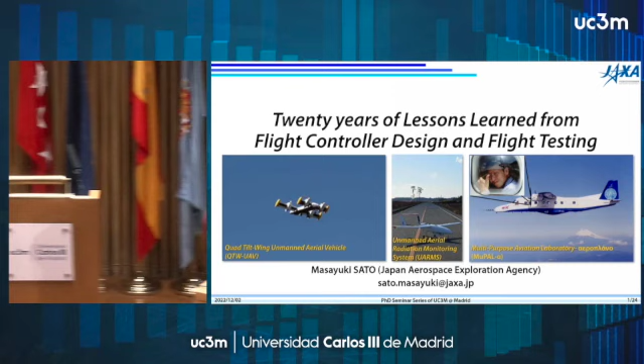But many people want to get back to their hometown, so we must examine how much radiation affects the area. If you can walk there and check that radiation power is not so strong, that's fine. But if there is a spot where radiation power is so strong you cannot get there, if you measure over there, you will be radiated - it's terrible. So to escape such a tragedy, this aircraft was developed.

Radiation power is monitored from the sky - it's a very convenient and safe way to examine the radiation power around the Fukushima nuclear power plant. But during this development, we found that finding an appropriate runway is very hard, because this aircraft has a conventional type, so we need maybe about 200 meters of runway to take off and land.

Is it possible to find such a long runway? No, indeed, it's very hard to find the appropriate place for landing and taking off.

Another solution to find such a big place is to invent vertical aircraft, VTOLs. That is quad tilt wing unmanned aerial vehicle, in short QTW-UAV. That's a vertical aircraft like an Osprey, so we have no need to find a wide area to operate this aircraft.

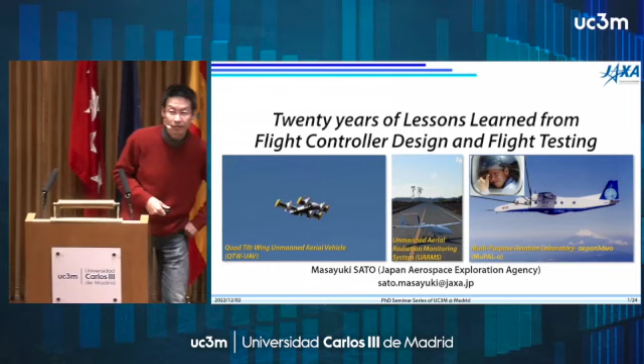But of course, this aircraft is operated by just electricity, so we need further development to use in practical cases. When we talk about these topics, let me give some lessons learned from these experiments. This is mine, and he is one of my bosses.

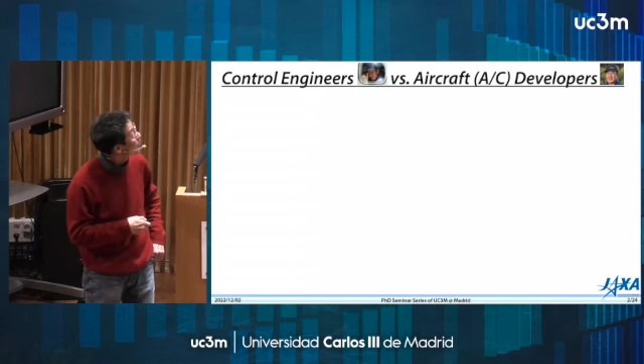So we first give some background of this talk. Usually control engineers, including me, want to implement newly developed controllers, but sometimes it's too complicated to implement in practical systems. But usually my bosses want to implement well-established controllers, that is, a PID controller.

So why do you use a PID controller? It's very simple and very easy to tune appropriate gains. But sometimes slightly poor performance might be introduced. Still, usually they want to implement very established controllers.

So the objective we'd like to compare: we would like to implement newly developed controllers to realize good performance. That's reasonable, but of course the first priority objective is reduction of development risk.

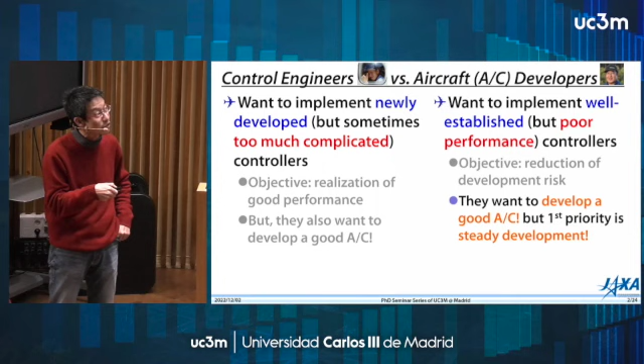But of course we also want to develop a good aircraft as well. They want to develop a good aircraft, but first priority is steady development. So the objective is the same on both sides, but different priority leads to a very severe conflict sometimes.

So that's why we usually invent or design very conventional flight controllers using PID controllers. After that, we replace them with sophisticated ones. During this process, we need to obtain our bosses' trust.

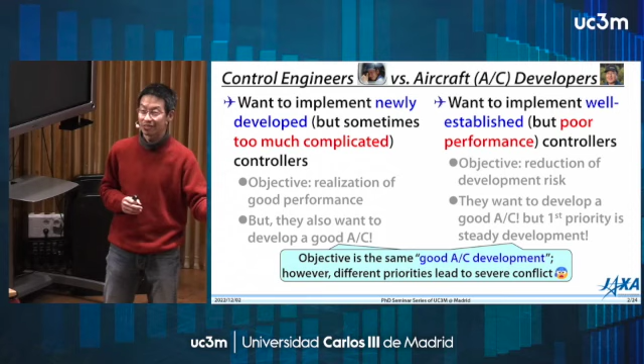That is the main message from this talk. So, of course, it is very important to pursue both ways. That is, developing new control technology and developing a good test bed are both necessary to survive this competitive world.

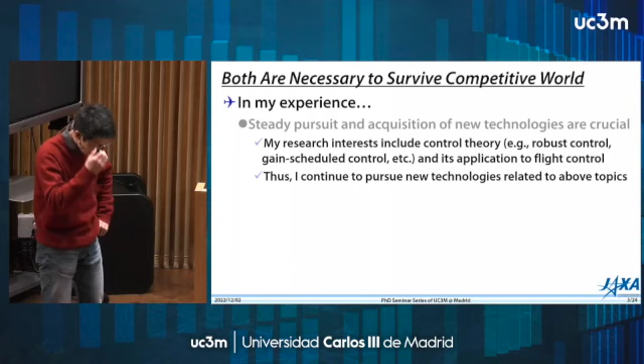In my experience, steady pursuit and acquisition of new technology are crucial to survive this competitive world. In particular, my research interests include control theory, so I continue to pursue new technology related to these topics, robust control and gain scheduled control, something like that.

But if you want to demonstrate your controller's practicality, it is very important to have flight demonstrations with your designed controllers. Otherwise, many workers in industry usually say, oh, your controller looks very nice, but how practical is your controller?

How do you implement it? That is a very critical point in my sense. So flight facility is very important to demonstrate your controller's performance, your controller's effectiveness compared to the conventional ones.

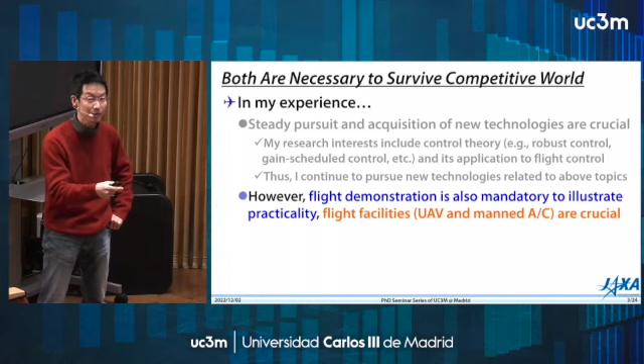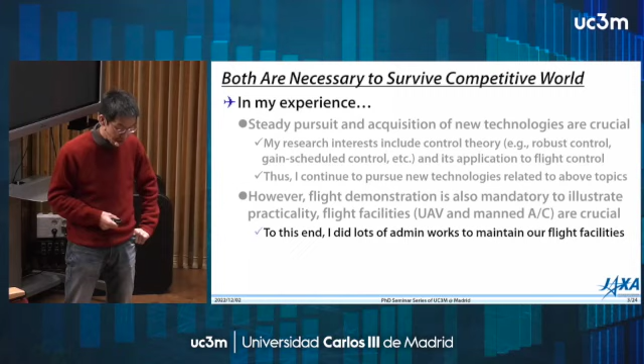To this end, indeed, I did a lot of admin work to maintain our facilities. So if you get into some research or academia positions, I strongly recommend doing a lot of admin work to keep your facilities. This is just a message for master's course students.

And in Japan's case, you may know this. Have you ever heard of MRJ's name? No? Oh, thank you so much. Yeah.

MRJ is a short abbreviation of Mitsubishi Regional Jet, and that was renamed Mitsubishi Space Jet. I remember that. Anyway, Mitsubishi Heavy Industries launched a regional jet, but its development has stopped.

Why? Because they wanted to implement new technologies as much as possible, but they could not get the certification from the authorities. So they stopped the development. That is very terrible for Japanese communities and Japanese researchers.

But we'd like to emphasize that if you want to advance your technologies and do related work, you must first use a very obsolete but very well-established technology to develop something.

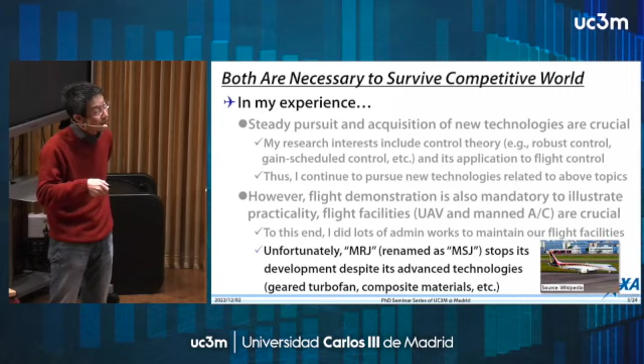That is a very bad example. So Mitsubishi Heavy Industries has stopped, and I guess we cannot restart its development program forever because we have already spent a lot of money, and I guess the authority has already abandoned the process, I think.

So in my belief it is very important to give a very steady development for the future. Okay, but this is a little bit of a historical topic. Japan, you may know that in World War II we lost against United States and many countries. But at that time Japan had some very advanced technology related to aerospace. So, in my understanding, one of the examples is mechanical gain schedule control in World War II.

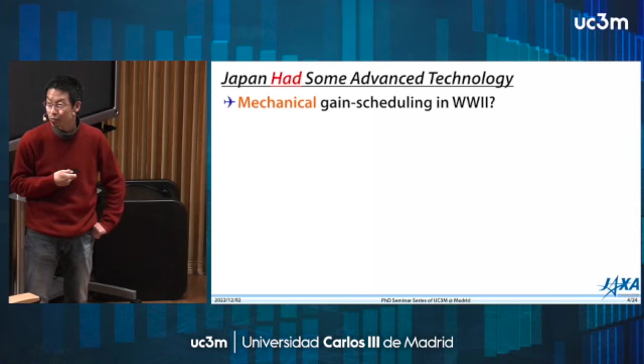This picture is pulled from Wikipedia, and this is a Zero Fighter here. The Zero Fighter uses mechanical gain schedule techniques depending on aerodynamic pressure.

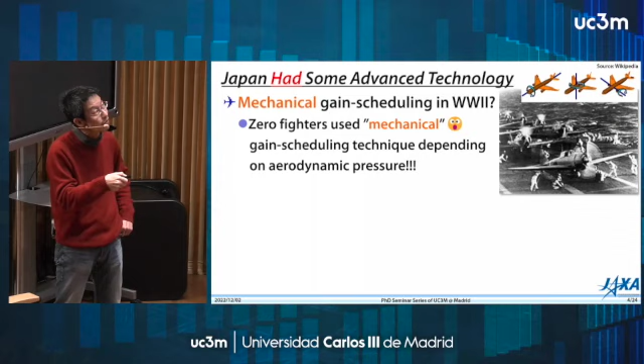Really? I hadn't heard of that before, maybe 2 years ago or something. So usually many guys already know the dynamics of flight control. That is, aircraft are usually controlled by an aileron, rudder, and elevator. They use aerodynamic pressure to create moments.

So here, if you fly in a high aerodynamic pressure condition, then with very small deflection angles the ailerons and elevators create a large moment. If a large moment is created, this might happen: pilot-induced oscillation. Of course, the cause is different in this case.

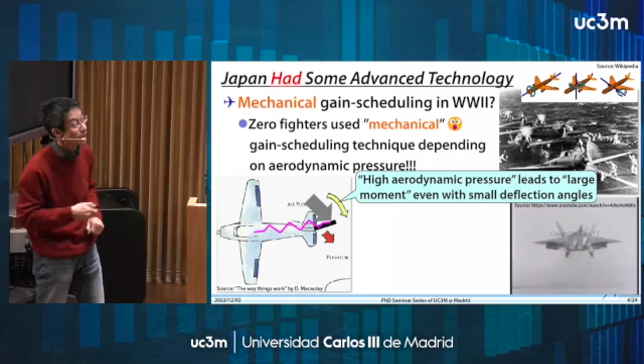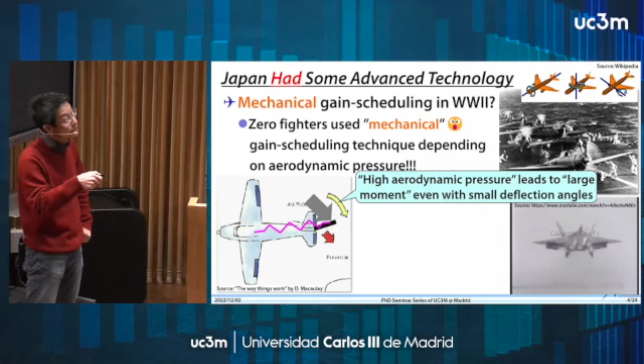This PIO was reported to be caused by the actuator limit. That is, there are some limitations of actuator movement, and this limit introduced such an accident. But similar oscillations will also be introduced by such a large moment.

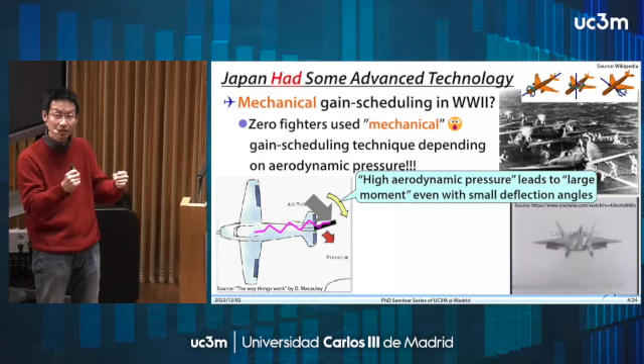For example, if the pilot moves the stick like this, and the aircraft moves very heavily and severely, the pilot thinks 'oh, it's too much' and reacts. But again the reaction is too much, so there is pilot-induced oscillation like this.

That is amazing for us. This is indeed a mechanical gain scheduling control technique. Of course nowadays we can easily solve this using software and advanced control techniques, but that was an amazing technique in World War II.

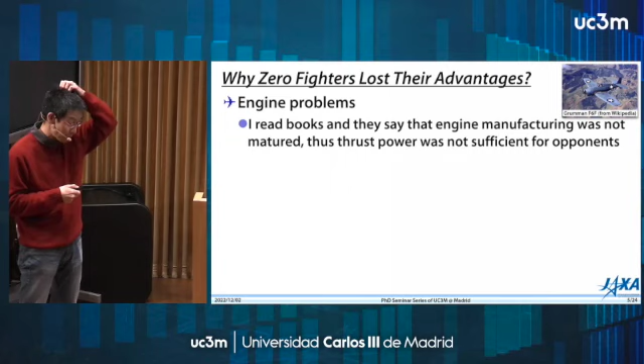So you may know why Zero Fighters lost their advantage. Of course there are several reasons. One of the reasons, which I read in several books, is that engine manufacturing was not matured, so thrust power was not sufficient compared to opponents like the Hellcat, like this one.

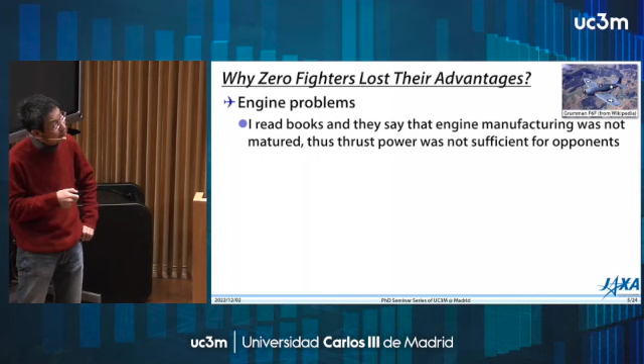And of course we have another problem, the structural problem. The fuel tank is very fragile. To reduce weight, the fuel tank easily catches fire without bullet protection and so on. And of course the maximum operation speed is reduced due to insufficiently strong structures like this one.

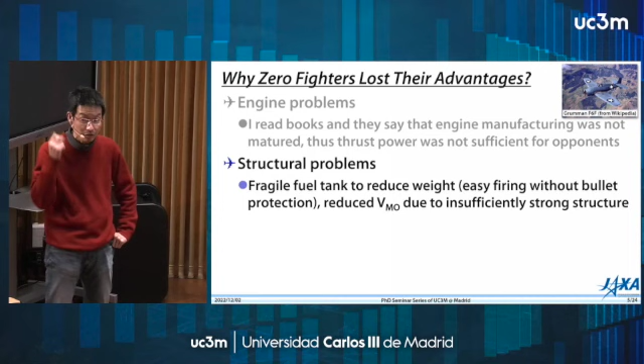But in my opinion, the most crucial factor is lack of humbleness. Usually, how to say it, Japanese might be slightly arrogant because their fighter had a lot of advantage compared to their opponents, so they didn't continue polishing their techniques.

So in my understanding, this is a very important part: to be humble. You may know that in Japan, in the late 1980s, we had a big bubble economy and a lot of money, but the bubble economy has already gone away, and Japan is still struggling in economic crisis nowadays. So I think Japanese people might be arrogant, and it is very important to be humble.

So my general message, this is a very general message in particular for master course students: be humble and keep trying to acquire new technologies. Of course that is a kind of spiritual talk, sorry for that. But after that, I'd like to talk about flight control design and flight testing.

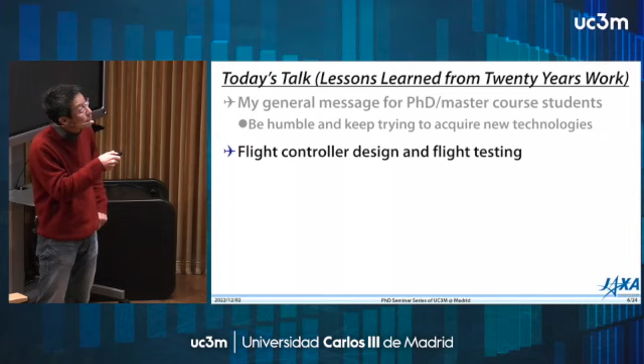First I'll give some topics related to in-flight simulators, using the MuPAL-alpha. In this flight test we designed flight control using H infinity control techniques. Of course nowadays H infinity control is slightly obsolete, but maybe 15 years ago H infinity control was still active, a very hot topic. At that time usually it was not allowed to implement H infinity controllers, but due to some reasons we indeed implemented H infinity controllers on an actual aircraft.

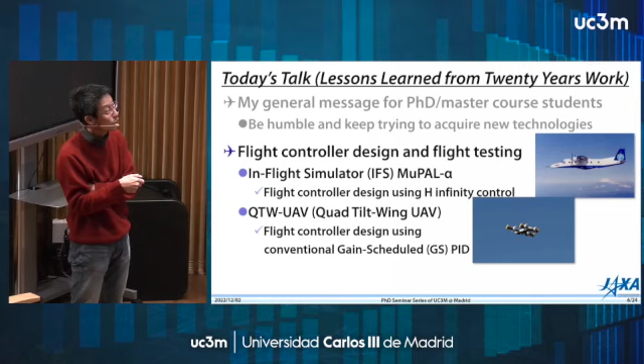After that, I'll talk about flight control design using UAVs. In this case we designed conventional gain scheduled PID controllers, and after that I'll talk about UARMs, the unmanned aerial radiation monitoring system.

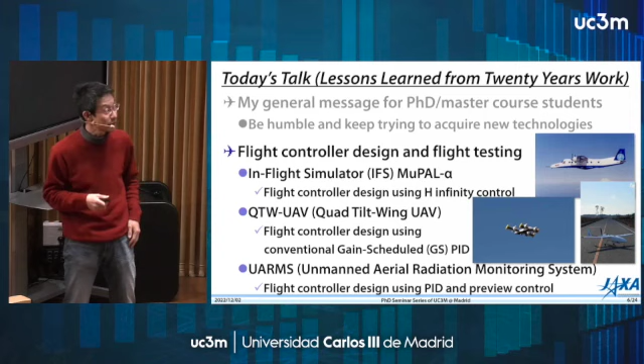In this case, we incorporate preview control in addition to the conventional PID controllers. Of course, at first, my boss was not allowed to implement this controller, preview control, but after several steps, we got permission to implement it. So I just talk about this issue.

Have you ever heard of the in-flight simulator? Could you raise your hand if you heard? Okay, nobody knows. What is an in-flight simulator? That is an aircraft that achieves an extension of ground-based simulator to the flight environment, the real-world cues. It's a conceptual description.

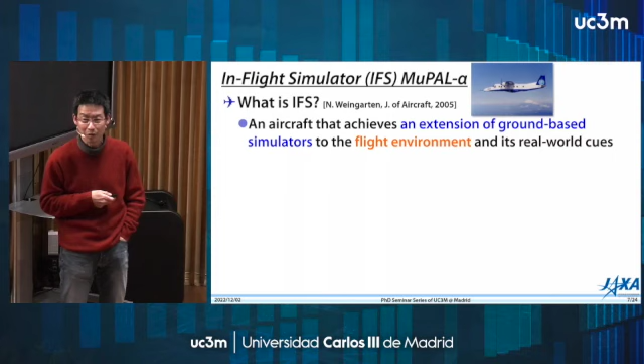In other words, the in-flight simulator is an aircraft that can mimic other aircraft characteristics in flight. So how do we do this? How does MuPAL-alpha mimic other aircraft characteristics?

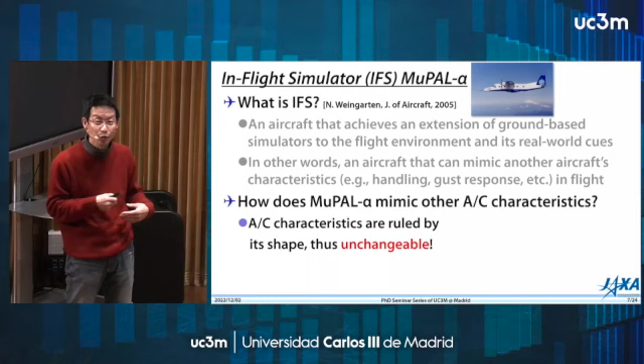Of course, you may know that aircraft characteristics like CL alpha, CL, CD, and such coefficients are ruled by its shape. Of course, we cannot change shapes without authority permissions. How can we change it?

So that is an in-flight simulator controller. But if we design an appropriate controller to mimic other aircraft, this aircraft moves like other aircraft. So the in-flight simulator was used to demonstrate and examine handling characteristics for newly developed aircraft.

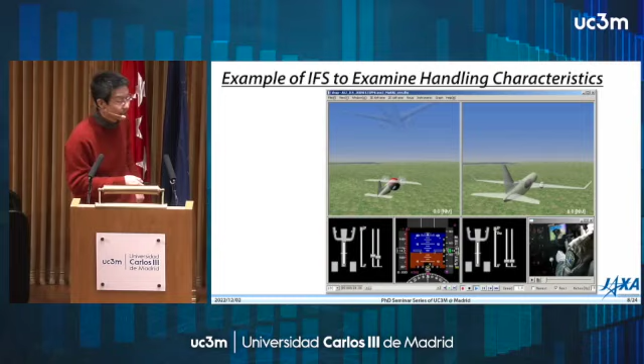This is an animation here, but this is an actual video recorded in the flight test. In this animation, that model aircraft is shown here. That model aircraft motion is calculated by an onboard computer with right-hand side pilot input.

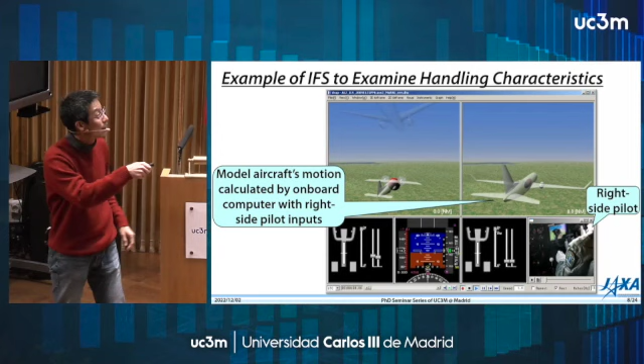Of course, this pilot indeed sat on the right-hand seat of a research aircraft, and controlled the wheels, pedals, throttle levers, and so on. Using this control input with appropriately designed controllers, using just the aileron, elevator, rudder, and thrust, our MuPAL-alpha moves like this aircraft.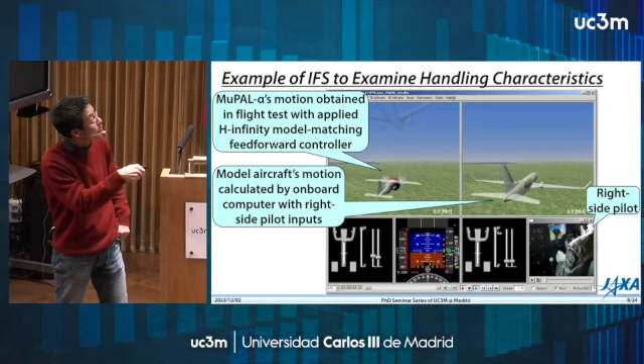MuPAL-alpha motions here were obtained in a flight test with applied H-infinity model matching control. Okay, I'll show you a video.

So there is no sound, sorry for that. But indeed, here the F2 pilot, a fighter pilot working for Mitsubishi Heavy Industries. We had a good collaboration with Mitsubishi Heavy Industries at that time, and he came to my facility site, got on our MuPAL-alpha, and controlled our aircraft.

And in this case, this aircraft is approaching some regional airfield.

And you see that there is an airfield over there. Of course, this pilot doesn't see the motion of this aircraft. This pilot just sees outside from this aircraft. So this is an offset landing approach. There is a runway there, and an offset approach is set, and he's trying to keep this straight away.

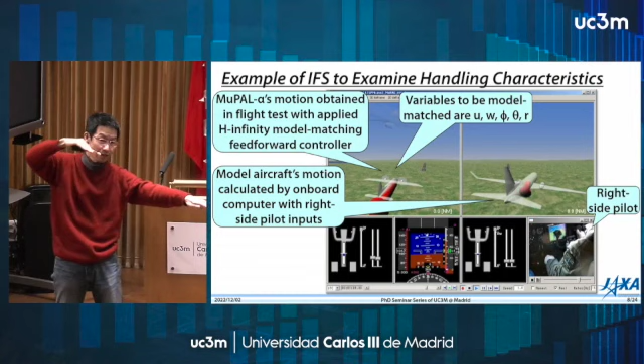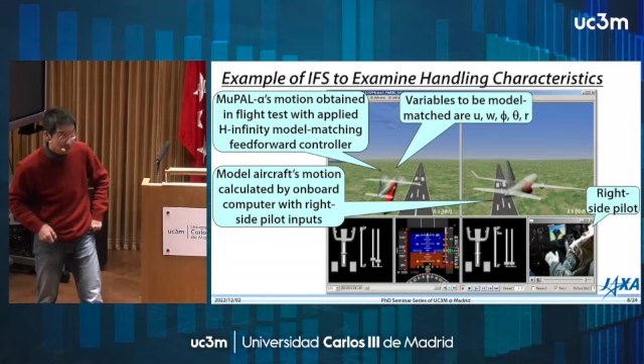And at a certain different distance from the airport, a maneuver is created by this pilot. Of course, yaw angle is slightly different because we cannot control 6 degrees. We just have 5 degrees, so we just control forward speed, vertical speed, roll angle, pitch angle, and yaw rate only. We cannot control yaw angle. So that is why there is some difference here.

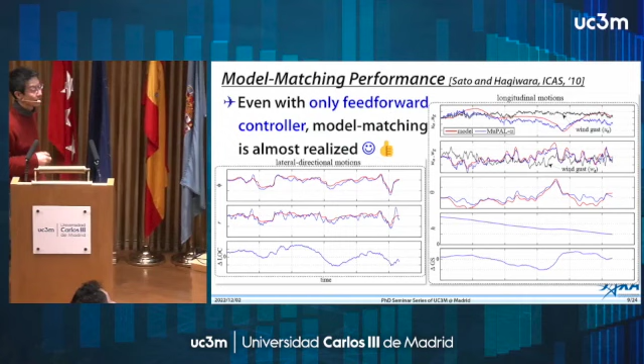But indeed, in this flight, even with only feedforward control, the model matching is almost realized. Because here the bank angle, yaw rate, the deviation of the localizer, and the longitudinal motion is here - that is forward speed, vertical speed, pitch angle, altitude, and glide slope deviations.

So the red lines represent models calculated by onboard computers, and the actual flight test result was drawn by blue lines here. The units are removed due to confidentiality issues, but as you see, there is almost overlapping here.

So usually, flight control engineers ask me why feedforward controllers alone were used. Because feedback controllers change gust response, which may make the pilot feel different from normal aircraft motions. So to prevent such an effect, the customer required us to use only feedforward controllers.

But in feed-forward control design, we use advanced design techniques, H-infinity control design. And furthermore, we obtained trust from the pilot in JAXA. That was a very good occasion for me to obtain JAXA's pilot trust.

After that, for example, we implemented weird controllers for pilots. In this case, we use gain schedule controllers designed by LMI, so the matrix size, the controller size, is very huge. Like the state space model has about maybe over 300 values or something like that. That is very unconventional for pilots.

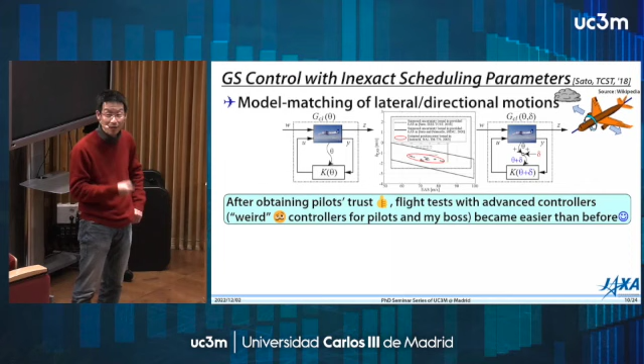Okay, after obtaining the pilot's trust, we easily implement our designed controllers. In this case, the scheduling parameter is affected by uncertainties. The scheduling parameter is set in equivalent speed, but usually equivalent speed is measured by pitot tubes, so we have some uncertainty in the measured equivalent speed.

But if we design appropriate gain scheduling controllers by considering the effect of uncertainties, we can easily design a good model matching control like this one. So the objective is to coincide the blue lines with the red lines. Here, on the left-hand side, you can see there are some discrepancies.

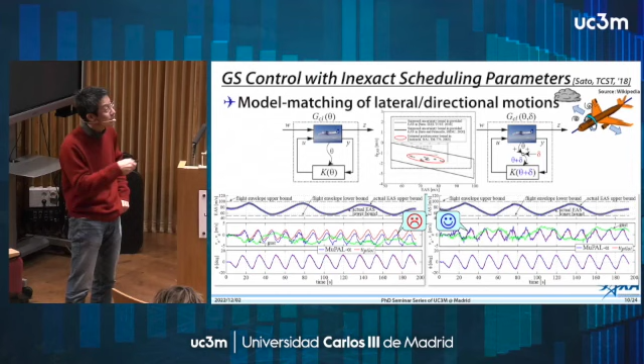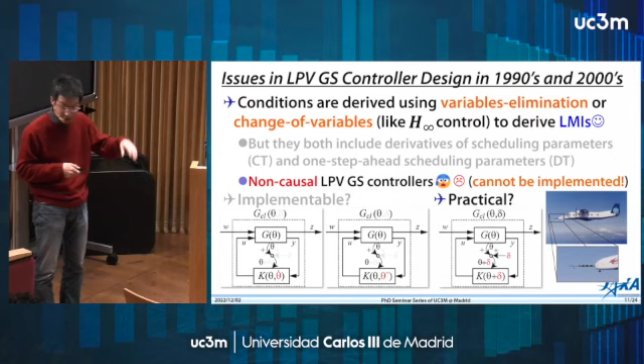Okay, this slide and the next slide are a little bit complicated, so I would like to skip a little bit. So this slide is... sorry.

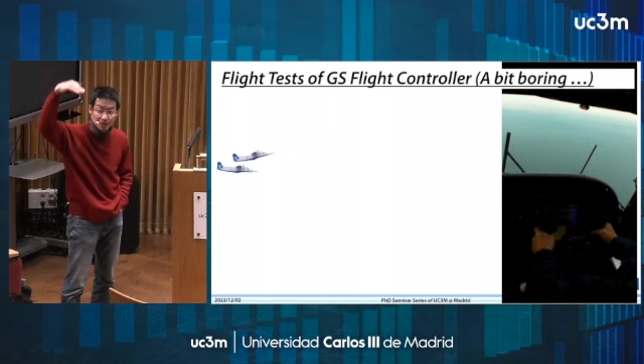Indeed, this is a flight test video. After implementing our designed controllers, we had a flight test. During this flight, the pilot moves control, like heaving and going down, and during these motions, roll and sway speed commands are created by fly-by-wire computers. But speed is controlled by the pilot maneuvering this way.

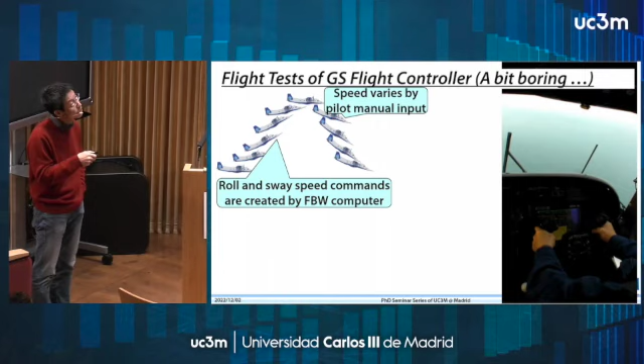During this flight, gain scheduling flight control was implemented, and we had a test result as shown before.

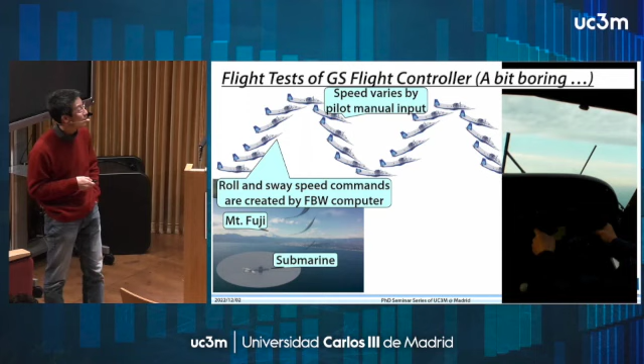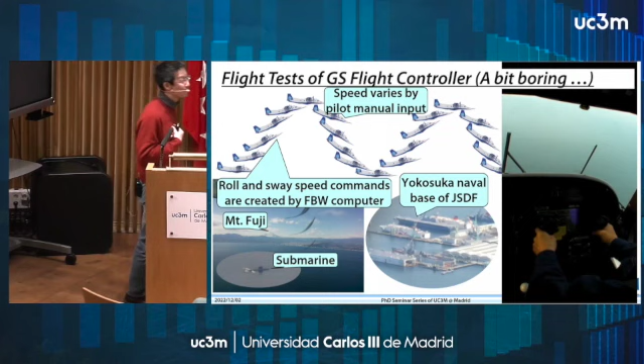During flight, we can see some good scenery, Mount Fuji, and sometimes we can see submarines, and we can also see the Yokosuka Naval Base as well. But of course, this is business, that is my duty. This is not fun, but anyway.

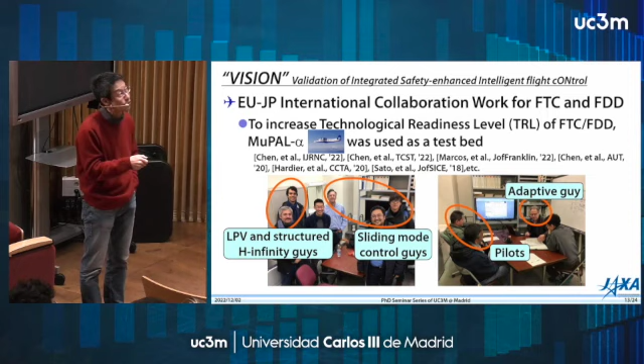After that, I had a good international collaboration work with Anders. Indeed, we have an EU-JP international collaboration for FTC, fault tolerant control, and FDD, fault detection and diagnosis, working with these guys. Here is Anders, as you see.

Lessons learned from 20 years working on JAXA MuPAL-alpha: good work should be done within customers' requirements, and after achievement, trust would be obtained, and then another chance comes. Thanks to, in my case, the vision indeed—I had a vision project in the EU-JP project, and I owe a lot to Anders, so thank you so much. And however, even within severe constraints, keep trying to acquire new technology or apply new methods in order to advance your skill. That is a very important message to myself as well.

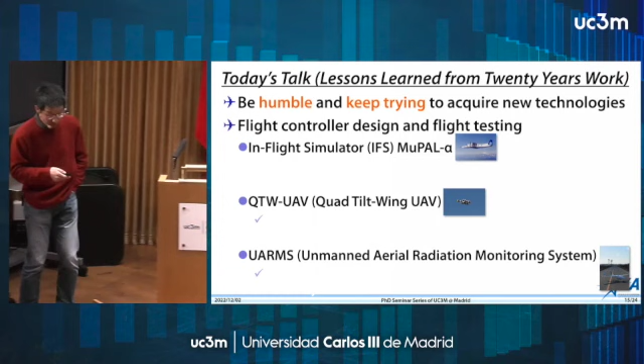I guess time is running, sorry for that. But next, we'd like to go to the QTW and UARMS.

As I said, the QTW is a conventional aircraft where the tilt wing is tilted up, up sideways. In this case, thrust creates vertical lift, and in this case, thrust creates forward speed. So to fly this aircraft, we must design a PID controller like this, a very conventional SCAS structure, but scheduled by the tilt angles.

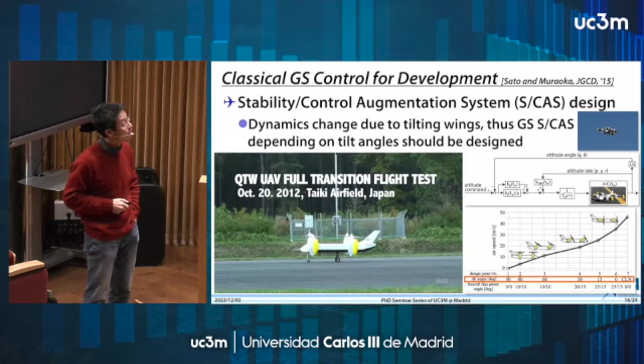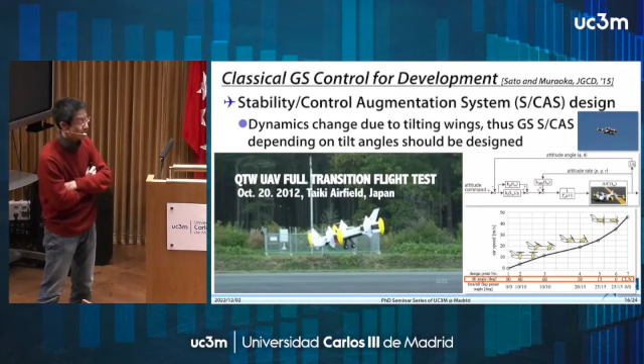Seeing is believing, so I'll show the video. After designing an appropriate gain scheduling controller scheme like this one, we implemented our designed controllers and had a flight test.

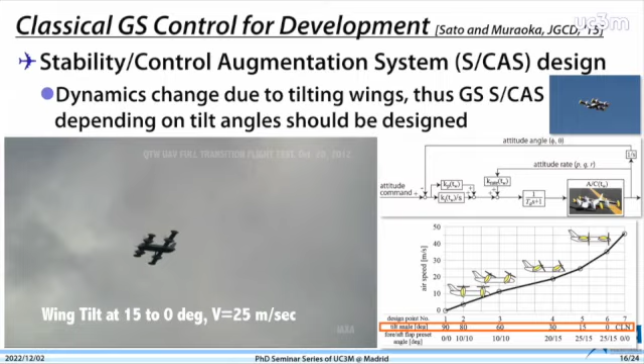At that time, we didn't implement speed control, so speed control was made by a ground pilot. I just called out the current speed and the target speed to adjust the throttle lever.

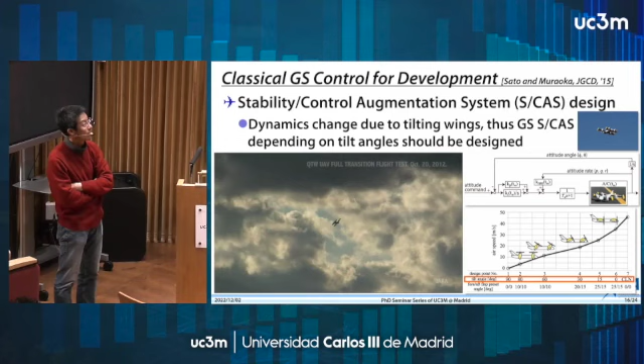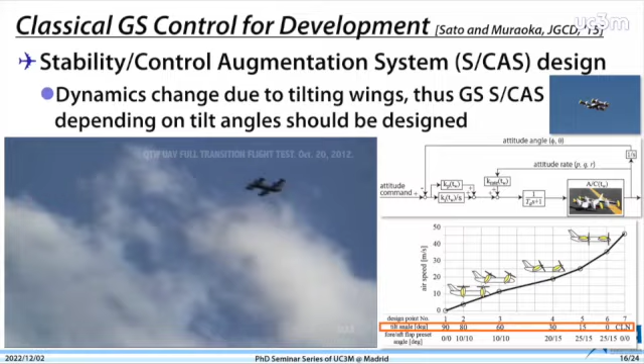Of course, in this case, I just show a successful flight like this one. But we had, sorry for that.

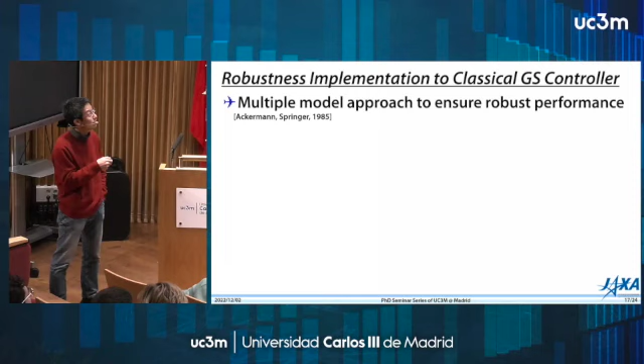How did we design the controllers? That is a very simple technique: robustness is implemented in the classical gain-scheduled controller using the multiple model approach. This is very classical. We first set a cost function like this one, and we set supposed models representing uncertainties. Using this cost function, we just minimize using the gains to be designed. This is a very simple combination.

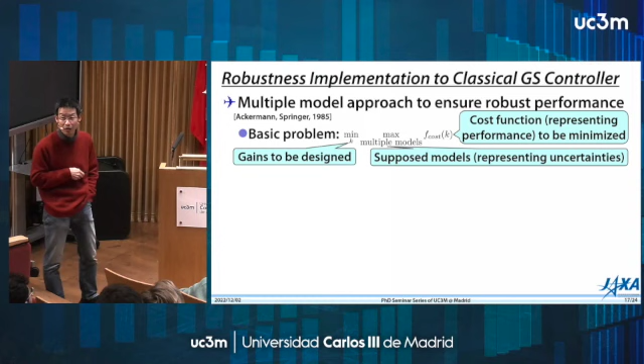But of course, we usually have some constraints to be satisfied, which are also implemented like this. In this case, we must slightly revise the cost function using weighting coefficients, lambda.

We also extend this formulation to the case in which the disturbance effect should be incorporated. In this case, we have maximum functions here and max functions here. For this augmented max function, we must minimize the cost function using K. That is a very simple formulation, and we can easily obtain practical controllers like these.

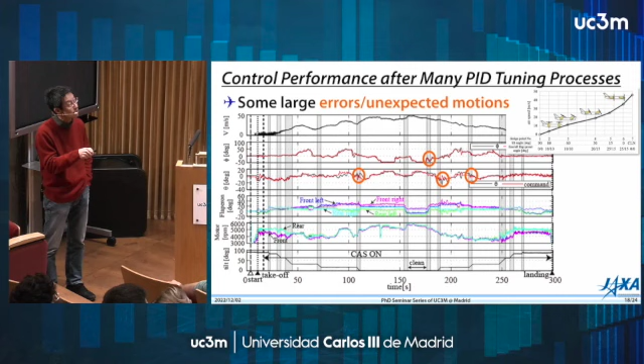You can see that the bank angle and pitch angle are controlled. The blue, red, and black lines are almost the same, so very good performance is obtained. But as you see, there are some large discrepancies that happen here, like this one. These cannot be overcome by gain tuning, so I think advanced design should be applied to overcome these issues.

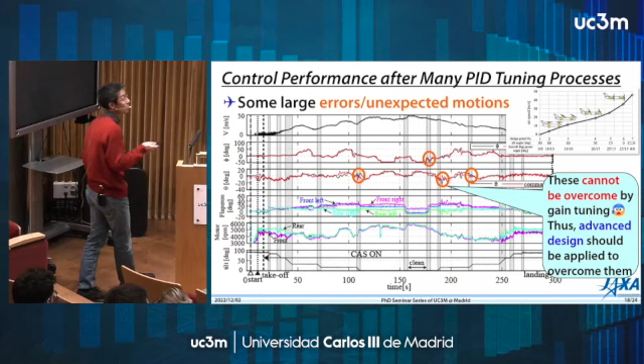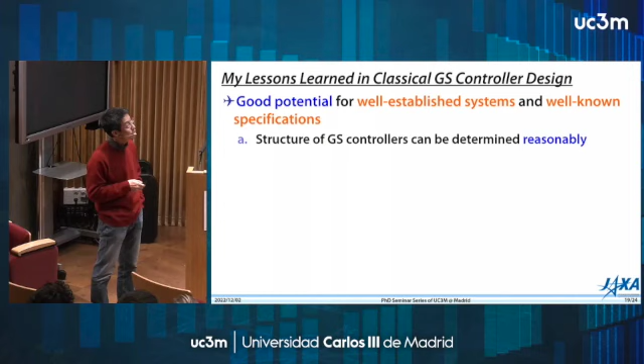In this subtopic, I found good potential for the conventional PI controllers. The structure of a gain schedule controller can be determined reasonably, and a very simple structure is very welcome for implementation and on-site tuning as well. Easy implementation is very appreciated by many researchers, and easiness of on-site design is also appreciated by many people.

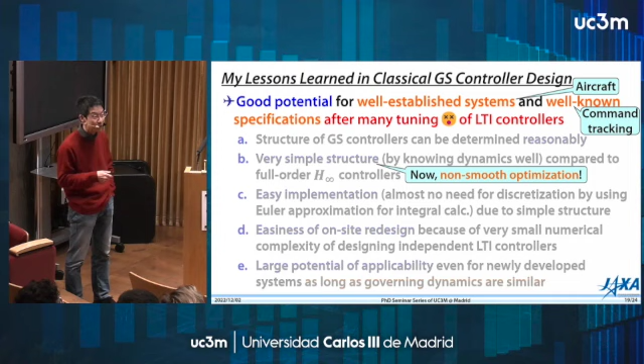For the successful flight, indeed, we did many tunings. It is very tedious and laborious work, so I think it is better to advance our technology for the future.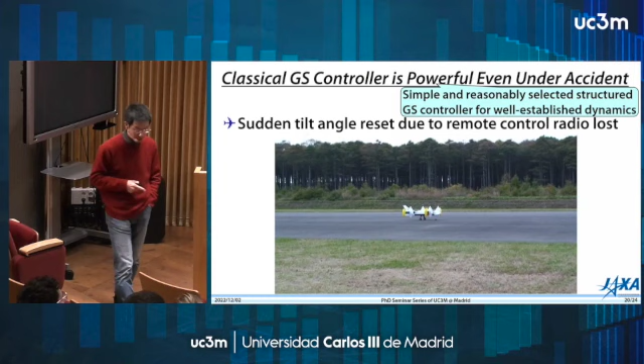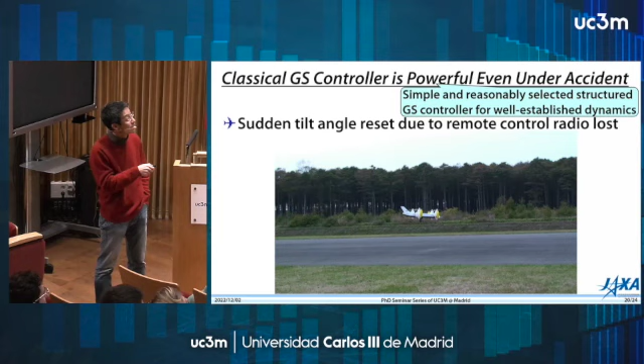But I also understand that the conventional PID controller works very well. In this case, however, there was a small accident. When the remote control radio was lost, the aircraft was falling down.

But the SAS system indeed worked well, and the SAS rescued this aircraft.

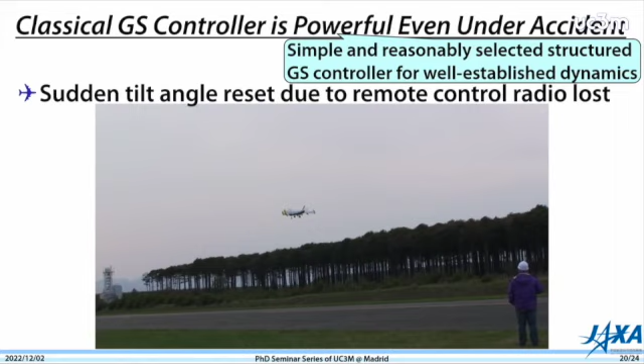On that day there was a very beautiful sunset. Here you see, very beautiful. But here, falling down indeed.

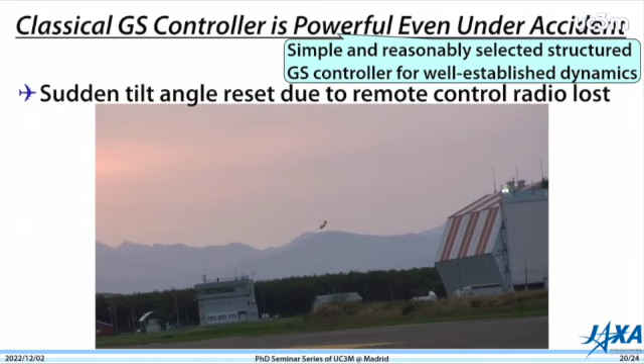In this case, only SAS works - the stability augmented system only. The control augmented system doesn't work. But even in that case, SAS works very well, and the SAS rescued this aircraft indeed.

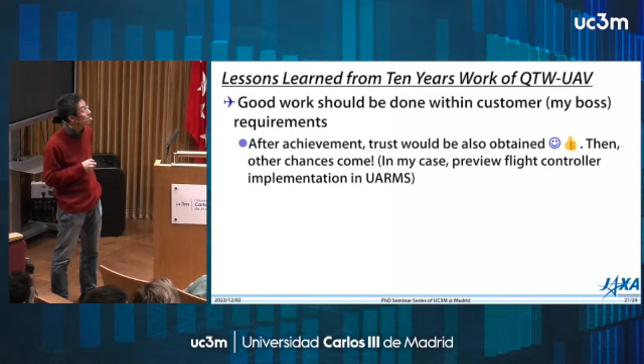Good work should be involved in the QTW work. Good work should be done within the customer's requirements, and after achievement, another occasion will come. Of course, in this case, significantly advanced technology was not applied, but the development was used as a chance to obtain the boss's trust.

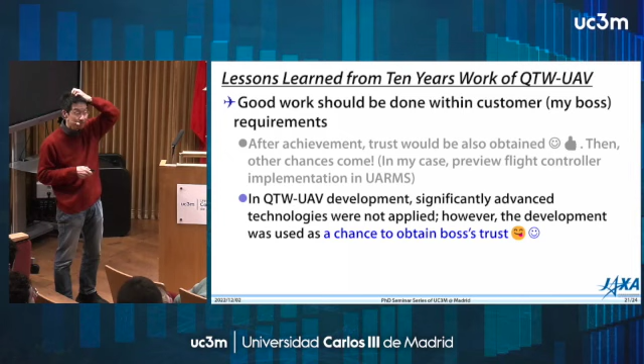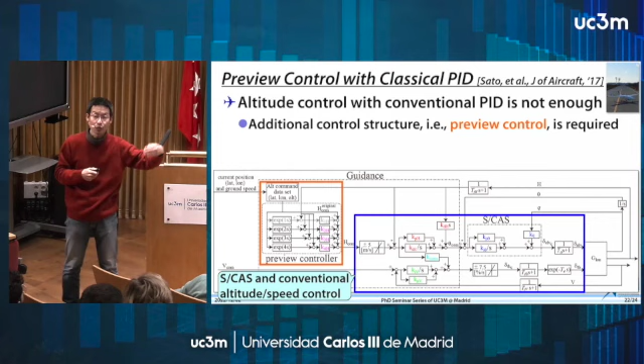We just implement a very simple preview control. The technical details are skipped here, but it's very simple - we just estimate the altitude command in the future, and we create the revised altitude command using appropriate gains.

At first, preview control was not implemented because the boss didn't allow me. But after the successful flight of the QTW, the boss admitted it.

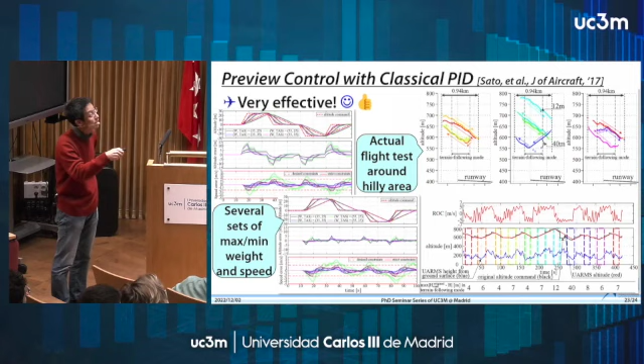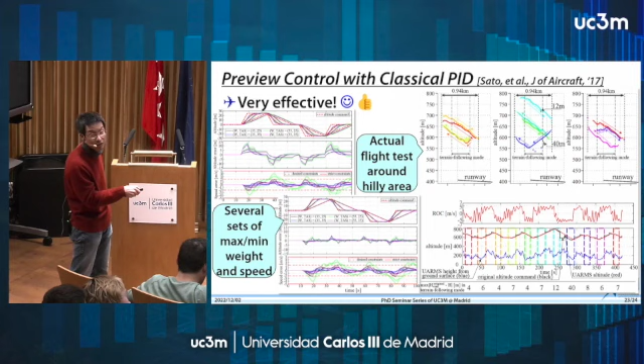Here, the right-hand side is the actual flight test result around the hilly areas. The maximum error in the climb phase is just a 12 meter difference. Here the difference is 40 meters. So it's about a quarter - much reduced compared to the conventional ones.

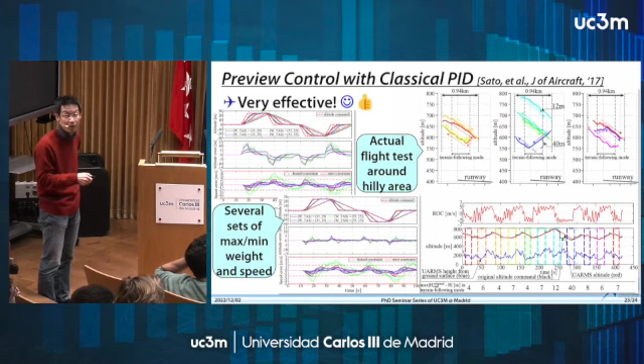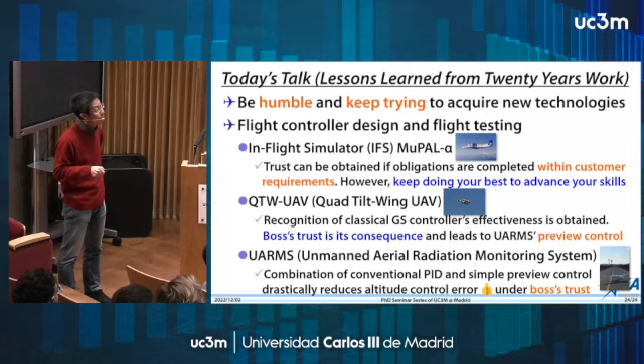I would like to wrap up my presentation. Be humble and keep trying to acquire new technologies, and trust can be obtained if obligations are completed within customers' requirements. But it is better to keep doing your best to advance your skills. In the QTW case, boss's trust were consequences of the successful flight of the QTW, and this led to preview control implementation on this conventional aircraft. Indeed, we implemented several advanced control technologies after getting the boss's trust and JAXA's pilot trust. So I think it is very important to be humble and keep trying to advance your techniques.

So that is the end of my talk. Sorry, a little bit overlapping.